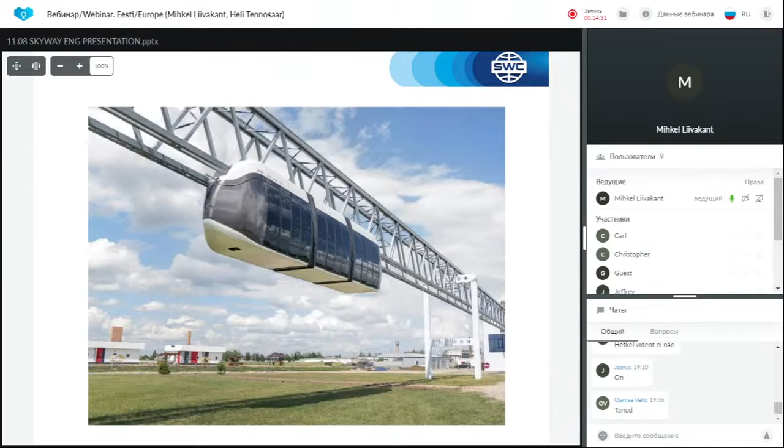And this is the rail. Basically, a similar one will be built in the United Arab Emirates as well, at the Innovation Center, with sea containers. So what I want to say with this picture is that with SkyWay, if we compare it with trams or trains, we can drive both above the track and below the track at the same time. But with the train or with normal traditional railways, we can only move on the pair of rails in one direction at the same time.

Also what's great to know is that we can take, for example, electricity cables or internet cables through the track itself as well. So in Africa, for example, where many villages still do not have electricity, we can take it to them via this SkyWay track.

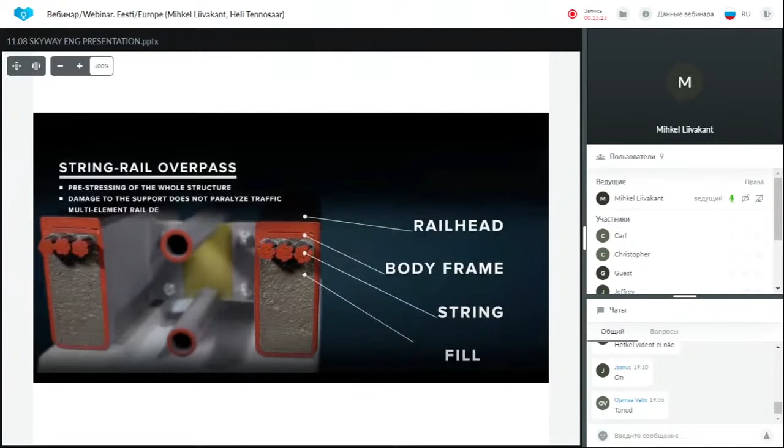This picture is made by me, and this was 2 years ago when the event called EcoFest 2019 took place in Belarus. I got the chance to drive with the Unicar, which you see on the picture in the sky. It was about 15-20 meters above the ground, and it's just amazing. You can also see this on video - if you put my name into YouTube, there is one video about 1 minute long, which I recommend.

The second point is that SkyWay is ecological, and as you can see on this picture, it suits very well with the surroundings. It doesn't harm an eye, and so on.

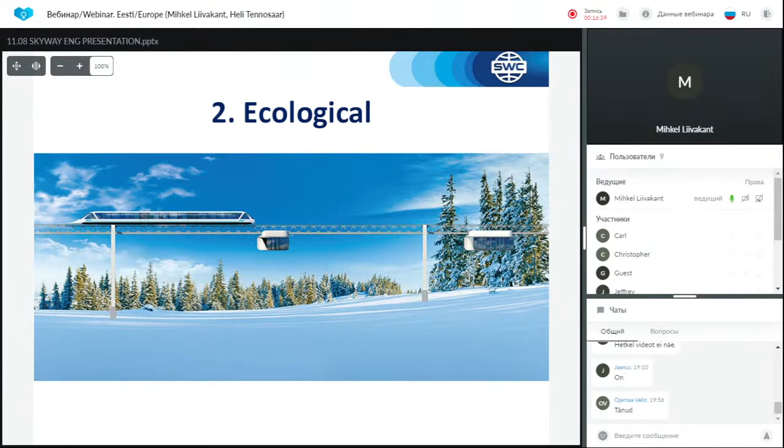Again, on this picture, what I tried to describe a few slides back, is that it's possible to have both directions, with two similar models at the same time, or like on this picture, one above and the other below.

Since it's electrical, it doesn't cause any direct CO2 emissions, and these technologies you can see on the picture at the moment will disappear in the near future, or at least in Europe.

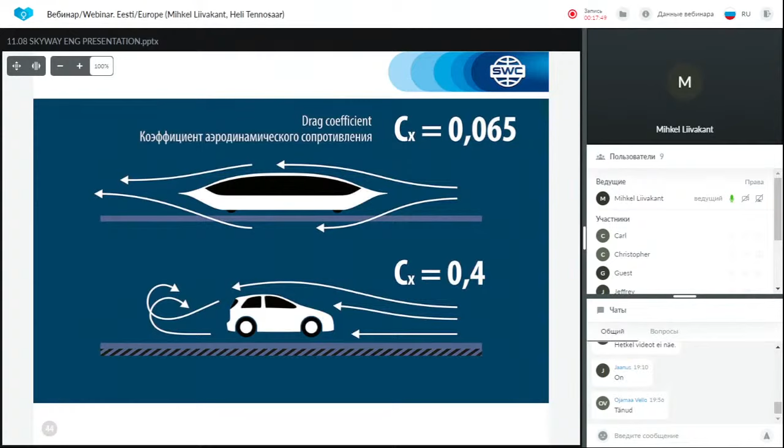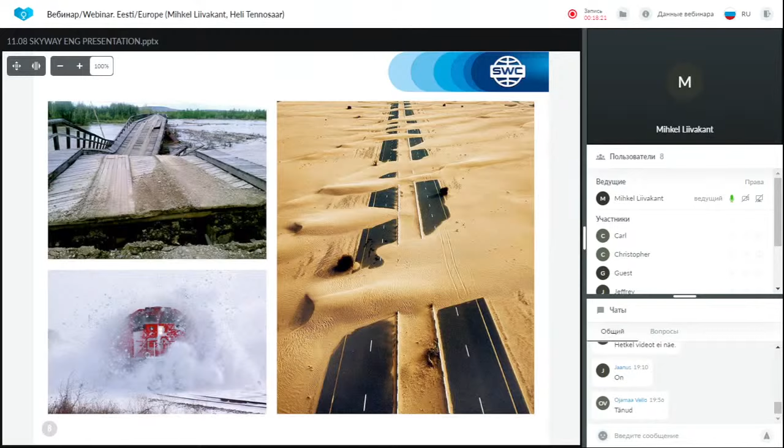And of course many problems with first-level surroundings take a lot of financials and manpower to clear up and clean. Therefore SkyWay does not have these problems since it's above the ground - the grass can grow and there's no need to clean the path.

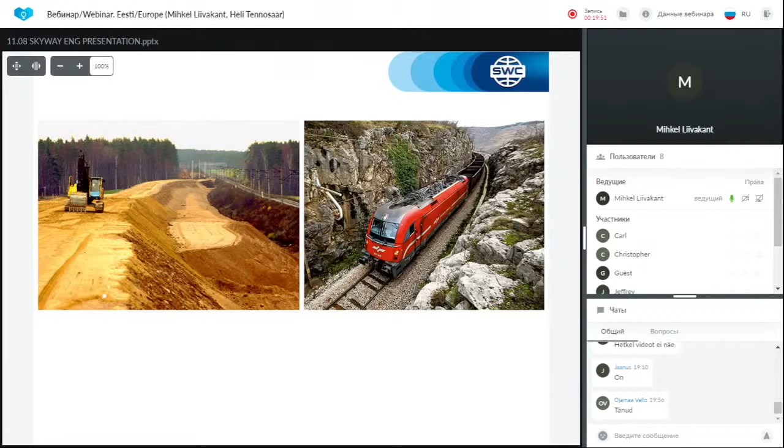But with SkyWay, basically sky is the limit, as I like to say - the track can be lifted even about 100 meters above the ground. So no forest or mountain, like you can see on this picture, causes trouble - we can take it from the bird's eye view, these tracks just placing supports from one place to another. And no river, lake, or water will cause any trouble.

We need a solution, and the solution is here - this is SkyWay. We know that the European Union countries are planning so that cars will be left in suburban areas, in special parking places, and then people can take public transportation systems, bikes, scooters, or whatever electrical vehicles exist by that time.

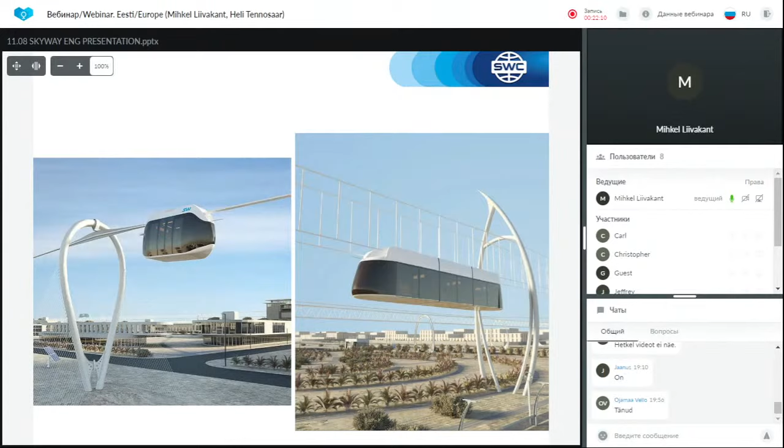They will go with those to the cities or to the workplaces and so on. So they plan to first ban fossil fuel cars. These engines which burn fuel, those machines won't be allowed inside the cities. And later on, I believe it's the same thing for electrical cars. So there will be only transportation technologies like you see on the slides, and therefore SkyWay is a perfect way to solve these issues.

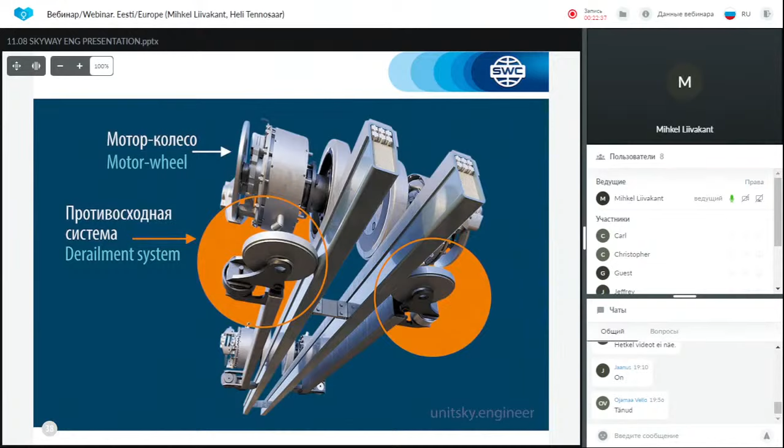Third point is safety. Many people ask about safety. Is it safe? How come it's safe? And so on. It's almost the number one question after people understand that this technology is amazing. But now let's talk about safety. There is a special derailment system and motor wheel which holds it on the track. So if we lift it upside down, it won't fall anywhere. It will be very stiff, like a spider clings to windows or ceilings, not floors.

And there is a 360 degree eye. This automated intelligence system will basically, if any obstacle should arise or come in the way, automatically stop and send information to the station or somewhere to let them know what happens. And inside the models, there are also cameras. So if you cross the borders, for example, we can show the passport and then move on.

And if anything happens with a model on the track above the ground, there are many similar models driving on this track, just maybe not at the same time. But if something happens with one model, the other one has these special elements in front, and each of these unibuses have these elements which will match with the other model perfectly. It can either pull or lift it to the maintenance or the station, wherever it's needed, to transport it. And this picture below is a real life picture as well, shown to us at EcoFest of how this works.

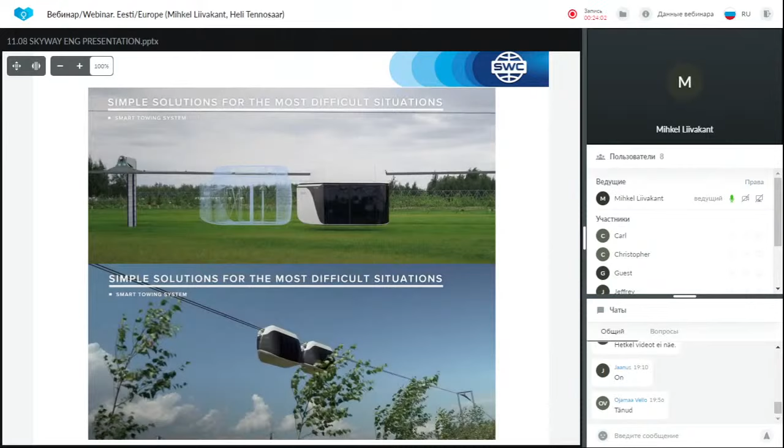And if the previous solution wouldn't be possible somehow, for whatever reasons, then we can just pull it with helicopters, or the old knowledge, as we know it already. We can put straps around our waist or body and lift us down. Well, most certainly it's much more safer than driving this way, right?

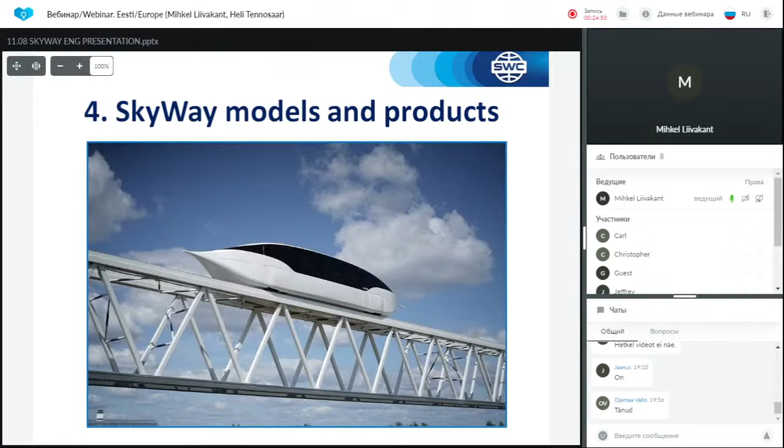Fourth point is that we have our own models and products. Many of them are already certified by Russian and Belarus standards, and the certification process already goes on in the United Arab Emirates as well. It started at the end of last year. It started in Europe as well, certification process for its models. And we have our own manufacturing and many bureaus and so on. So this team is doing an amazing job.

And these, what you can see on this picture, all these models exist, and I have seen myself them driving: the Uniwind, Unibike, Unicars, Unibuses, and the high-speed Unibus as well. But the high-speed Unibus, the track which is meant for it, has to be about 20 to 30 kilometers long. So this one will be constructed. It hasn't been done yet.

And it should be constructed in the near future, in about 1.5 to 2 years. The track should be ready for the high-speed Unibus, and then we can see speeds up to 500 to 600 kilometers per hour.

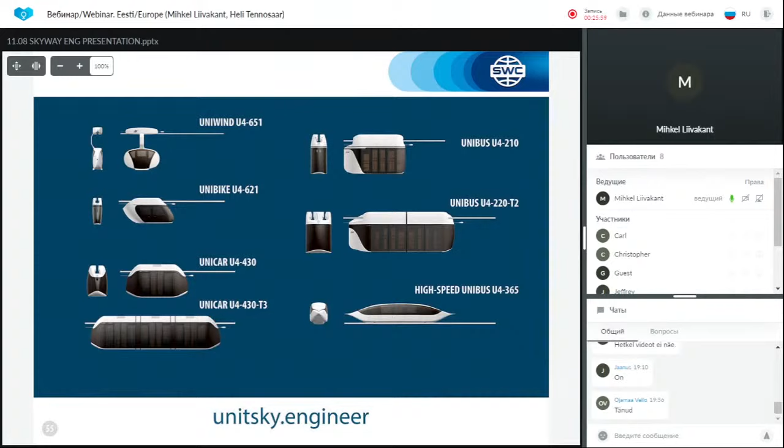Here is one picture I have brought for you, the tropical Unicars in Sharjah, also a real picture. And this is Unicar, the revolutionary one, and the contract is signed as well in the United Arab Emirates between the cities Sharjah and Khor Fakkan, about a 100 kilometer long track, which should come especially for this Unicar. We will see this later this year, and in the beginning of next year we will see these tests and certification processes for this Unicar.

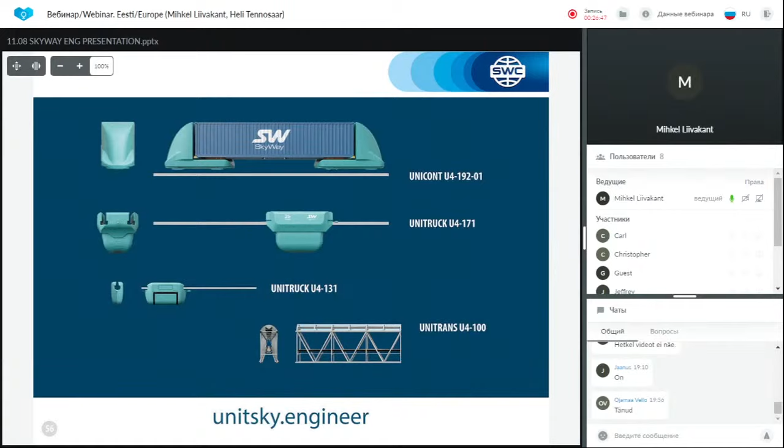Right now, the picture you saw in the beginning was much smaller, but the track also was a monorail, not the double rail, which comes, as you can see on this picture, how it will look. And again, two sides at the same time.

So at the moment, the trucks, the cars which take sea containers or ships, travel about 15 to 20 kilometers per hour average. The average speed is about 20 kilometers, but that's because of the pauses and naps, so to say, that truck drivers have to take. And for example, in Italy, on highways, Saturdays and Sundays are banned days for truck drivers. So it's much more difficult and takes much more time to transport cargo with these nowadays technologies.

But with SkyWay, we can take two sides at the same time. We can ride it above and beneath the track. And the other aspect is that the speed is about 80 to 90 kilometers per hour, and the loading process is under 1 minute.

Fifth point, why SkyWay? The demand for SkyWay is everywhere. We started from the Republic of Belarus and have made our way to the United Arab Emirates. I know from inside information that there are already many projects and personnel making their way to successfully implement SkyWay in their countries, at all different levels.

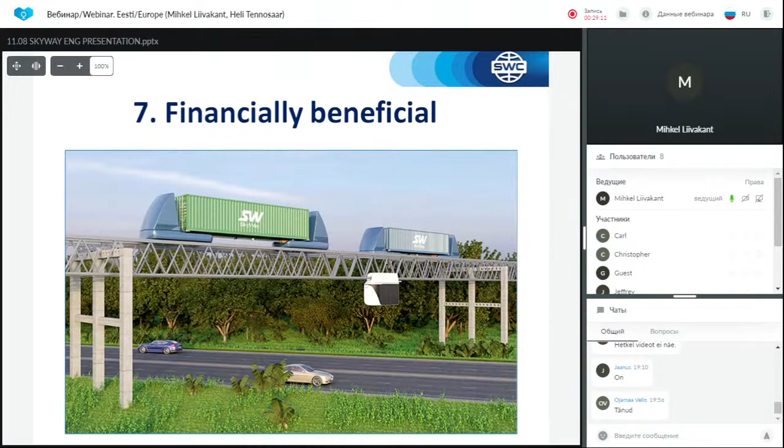Seventh point is that SkyWay is financially beneficial, and I can see two large groups here. The first large group is the customer - let it be the government, the city, or private sector companies placing orders.

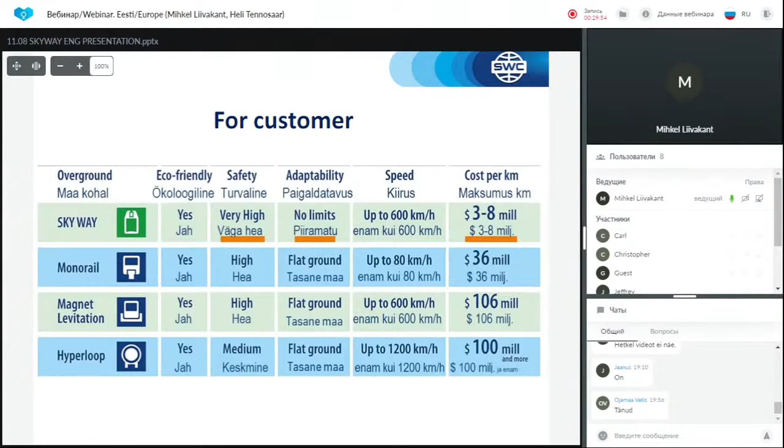This is mainly due to the fact that SkyWay is much cheaper than all the other possible alternatives, along with other aspects I've already told you within this webinar. It's a great technology. On the second level, it's very fast inside the city - it can go up to 150 kilometers per hour, for example.

The second side is that it's beneficial for investors, like me and many of you, who have given money to the company to construct and start this amazing business. When it becomes profitable, it will give dividends to us, the investors.

And when it goes to the stock market through an IPO, we can then share and trade freely the shares we've acquired through investing. But more about the investing side, and all the news I'll tell you today, is possible to find in your back offices.

About this project I already told you - the Khorfakkan project, a little bit more than 100 kilometers long. This is just amazing.

Second news, which I already covered within this webinar, but let's say it again: we will take part in the Expo in Dubai. So I recommend all of you to go there and see the SkyWay technology yourself, with your own eyes.

Quite recently, many different international media reports were made on the achievements of SkyWay in the United Arab Emirates. There were major news channels there that covered and showed this on television. Also French television covered us, and we were covered from India. CNN in the USA showed us, and we were on Australian TV as well, and in Romania, and many others.

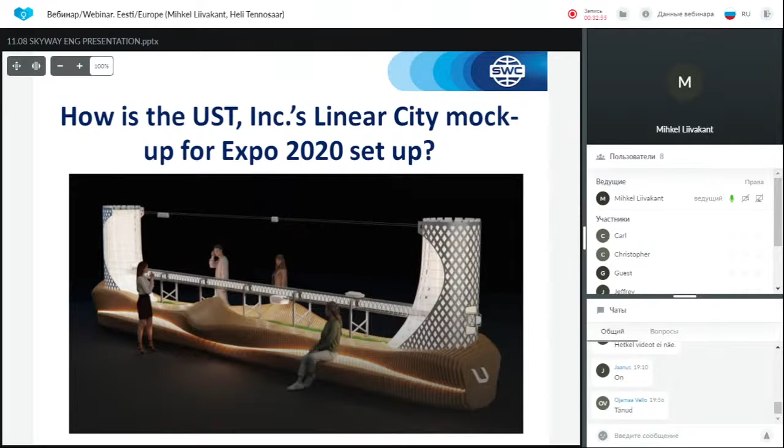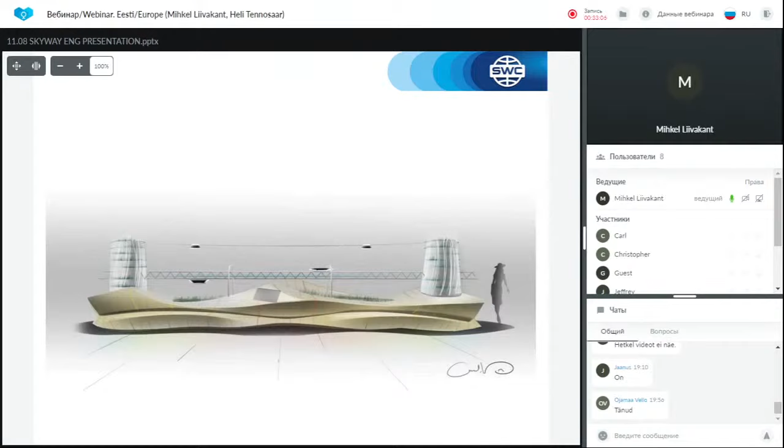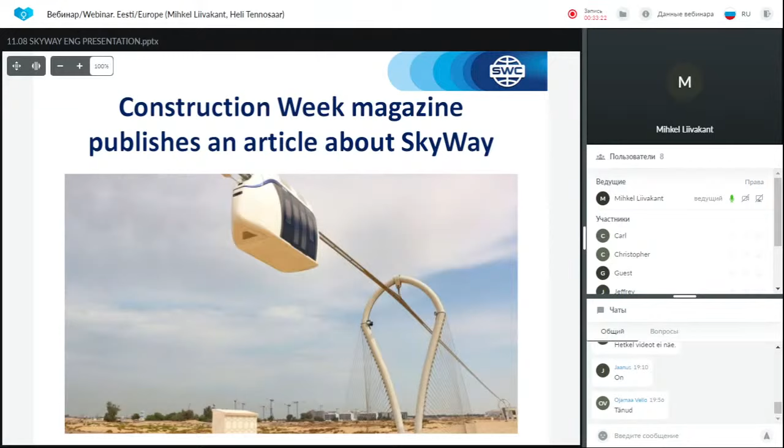Also, the Construction Week magazine published an article about SkyWay, which was really great. Again, they mainly cover new technologies and transportation technologies.